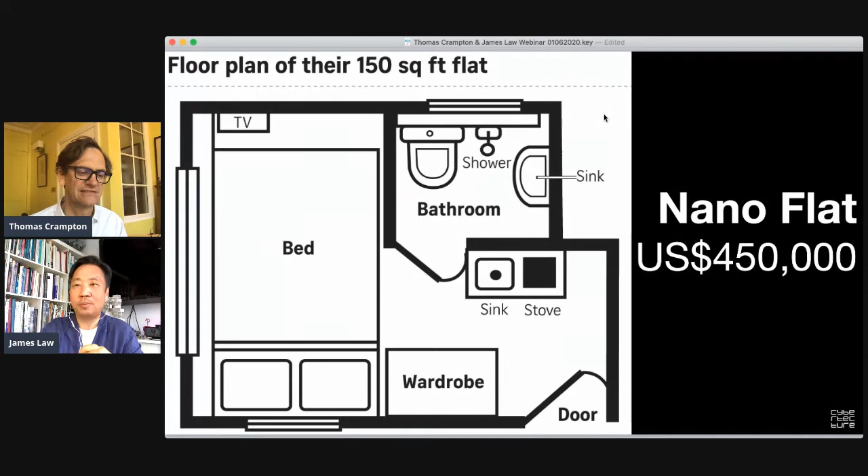But this is really an interesting physical manifestation of the problem, where if you are able to afford $450,000 to buy a property anywhere else in the world, you could probably afford to buy a house and even have a garden as well. But in Hong Kong, you literally just live in a room.

Many people who cannot even afford to buy an apartment must wait for public housing. And this is the state of our public housing: very, very old, very, very small, and not enough of it. The average waiting time for housing is now between 5 to 10 years, if at all. This 5 to 10 year wait is literally the golden years of your life.

If you are a graduate from university, and you certainly don't have the money unless your family has the ability to help you afford a property, you need to start saving up. But in the time you're trying to save up, you have to find housing. You want to live in public housing, but you have to wait 5 to 10 years. So in those 5 to 10 years, your limited income, which should have gone to savings to buy an apartment, goes onto extremely high rent. And so you've neutralized your earning power for at least 5 to 10 years.

And that's basically destroyed much of your hope of rising up in life in terms of your career. So the reality is that many families, even what we call lower middle class, touching middle class, let alone the lower classes, are living in extremely small spaces.

This is a typical picture, certainly not an outlier, of families having to share the rent and live in a very small apartment, where the apartment is defined as just enough space for them to cook, to eat, to bathe, to live, to do their homework, all in one space.

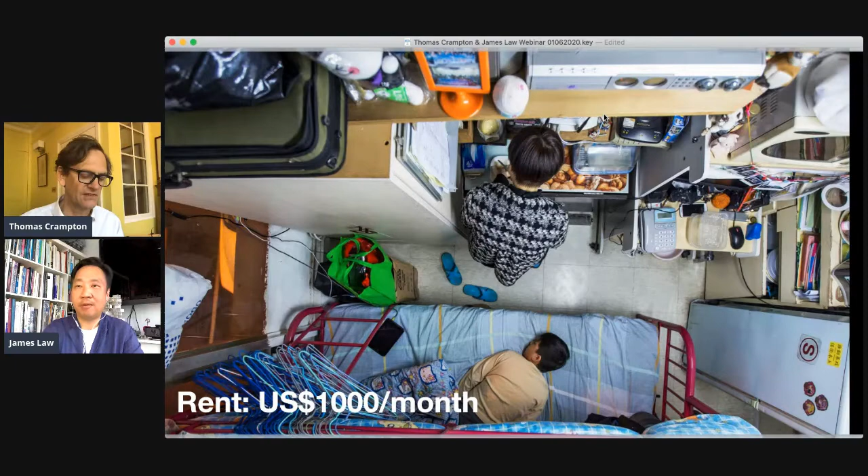So all of those contradicting factors have led to a pace of public housing that is not commensurate with the needs of the people here in a dynamic, growing city. And it's also not something just in Hong Kong, it's also in the rest of the world.

Moving on, to illustrate the apex of this problem: in an aging population like Hong Kong, just like in the rest of the world, elderly people don't necessarily have savings, but they still need to live, and some are pressed to live in what we call caged homes, where for $250 a month they get a caged bed space, basically their own little world. It's entirely inhumane, I would say, and also entirely unhealthy, especially in the context of COVID-19, where there is no social distancing, no capability to separate yourself from your neighbors. You're literally in a cage above your neighbors, so that's a perfect place for COVID to spread.

Absolutely, and there's no escape from it. The way in which we have built and designed the housing in this particular space is not designed, it's an outcome of need. There is no provision for pandemics, disease, and natural disaster, because no safety aspect, no health aspect, no resilience aspect has actually been considered. So it's pretty terrible. Let's move on to what that outcome is.

As we have seen in the news recently, even in the last 18 months, news about Hong Kong shows social unrest has really come to a fore. And in Hong Kong, social unrest is actually very, very rare. The last actual social riots we had was in 1967, so we didn't expect that it would necessarily come back. Hong Kong people are actually quite passive and quite civilized in general.

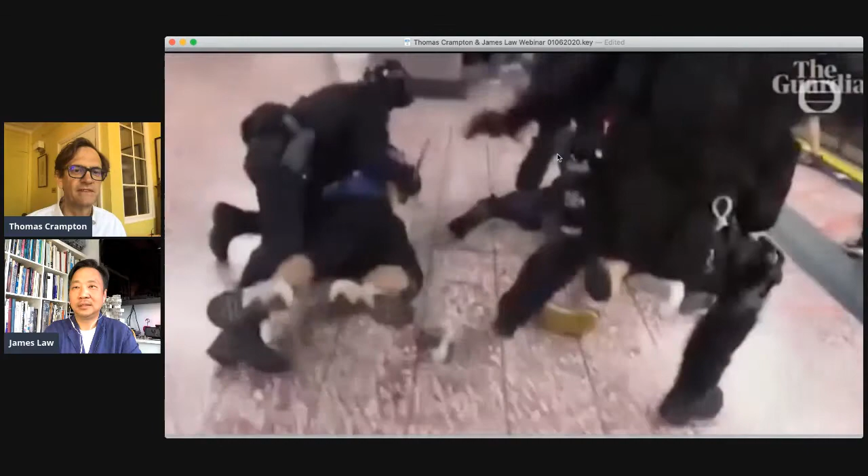This is a video of the police running down into a subway station, trapping protesters who are on their way home, and basically having quite a violent interaction with them. It's the last thing you want to see in civil society, when two sides of the story are coming to blows, and it's almost quite frightening.

Okay, so a harrowing situation, horrible conflict. Yeah, and of course, it's not just about housing. It's about many other factors as well. But as you can feel, the amount of stress and pressure and worry in society is quite high. And life is valuable to each and every one of us.

Having a home to live in where we can feel safe, where it's adequate for our needs, is a key basic need. And we've gotten to a stage now in Hong Kong where we are only able to build things like this, and we're not building enough of it to house everybody that needs a home. So what can we do? This talk shouldn't be just about problems, it should be about ideas and solutions.

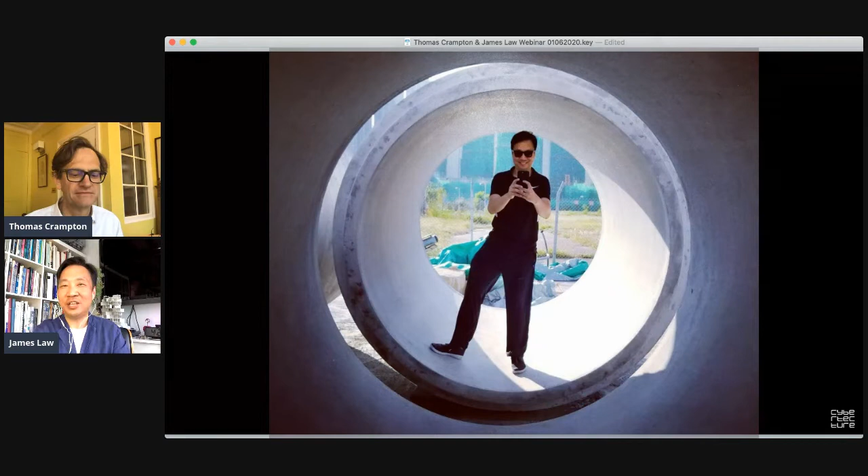So here, to provide a house for $15,000 US. Okay, so what is OPOD? OPOD is effectively using available concrete water pipes, which are mass manufactured in almost every major city in the world for storm water drainage, and converting these pipes, which are extremely cheap and already mass produced, into flexible housing for people.

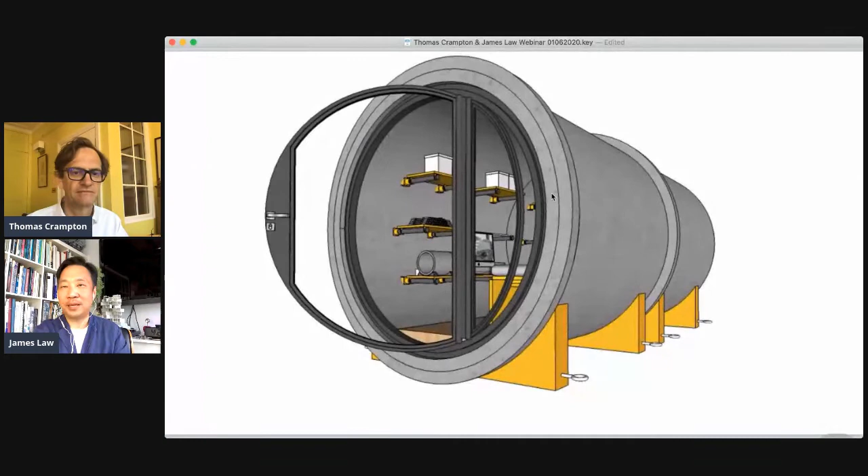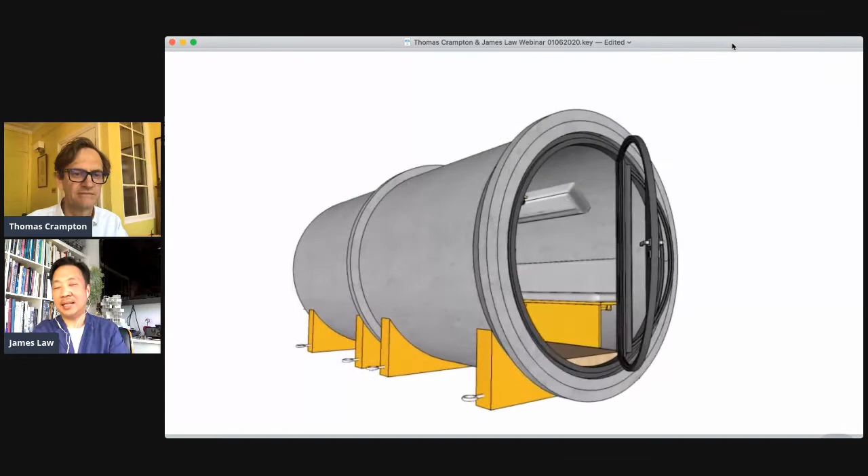The way we do that is to connect pipes together and fit them out so that inside there is a living and sleeping area, a bathroom, and a kitchen, and have these be deployable very quickly to vacant land in any city, providing that at a very low rental. Being concrete and being readily and quickly available is the only way we can provide housing that has an impact better than a conventional building.

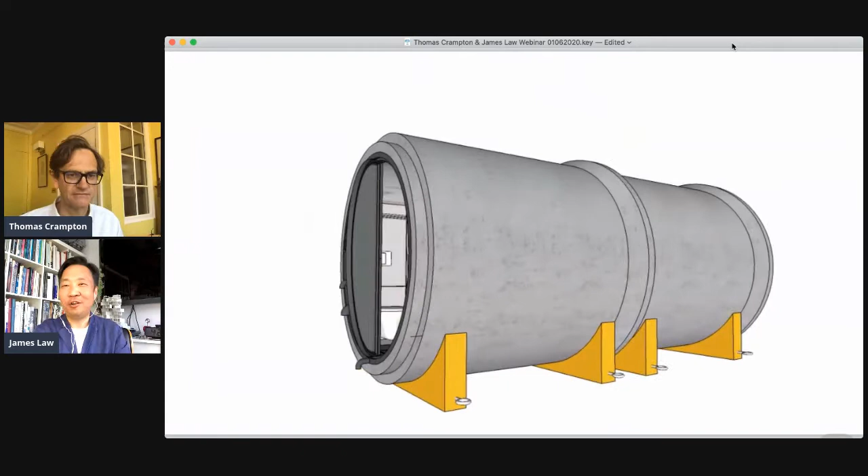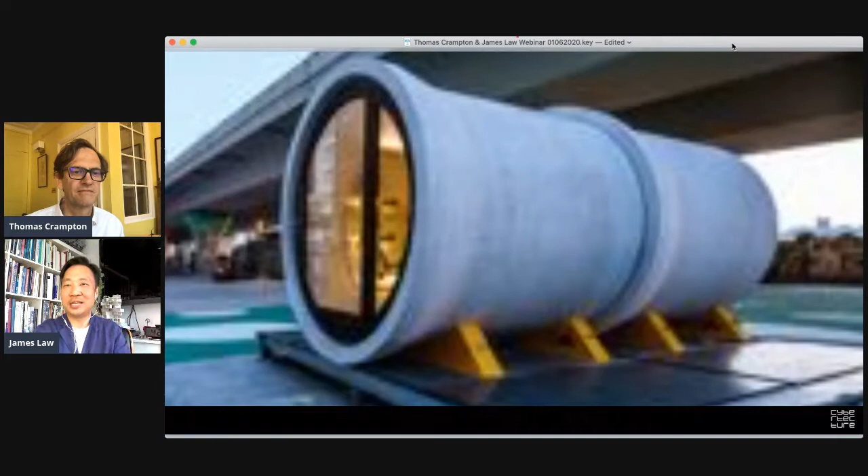So we went off and built the real one. This is a picture of one of the real ones, one of the prototypes. If you click through, you'll see it from different angles. It's actually quite a funky little house that has all the mod cons you need at a very affordable price. And it's very strong, it's fireproof. It's actually going to last like 50 to 100 years because it's a concrete water pipe. And it's movable as well.

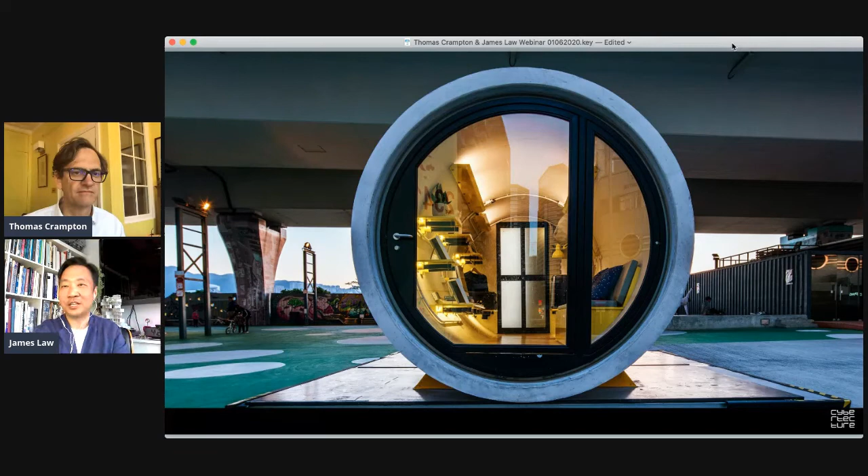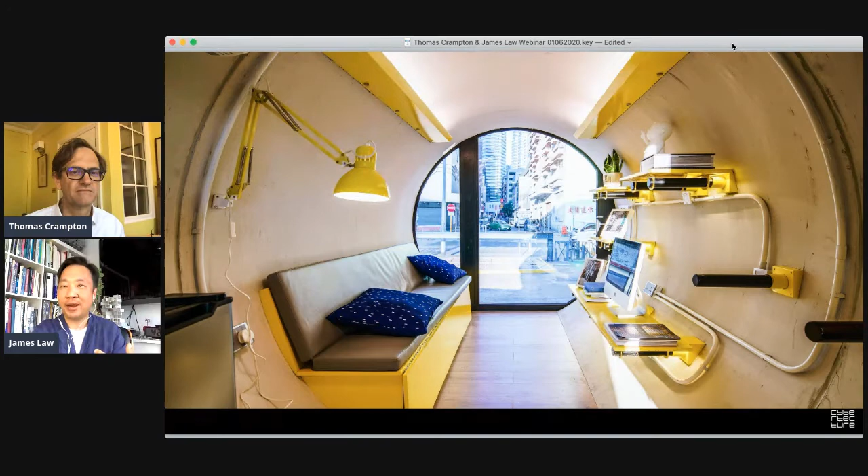This is the inside. The OPOD has two parts. This front part is the living area, and the back part is the bathroom and pantry area. It's very small, only 100 square feet. The sofa can be folded out into a bed. All of the furniture you see here is basically recycled construction waste - scaffolding pipes, timber boards, etc., repurposed to create this furniture and shelving.

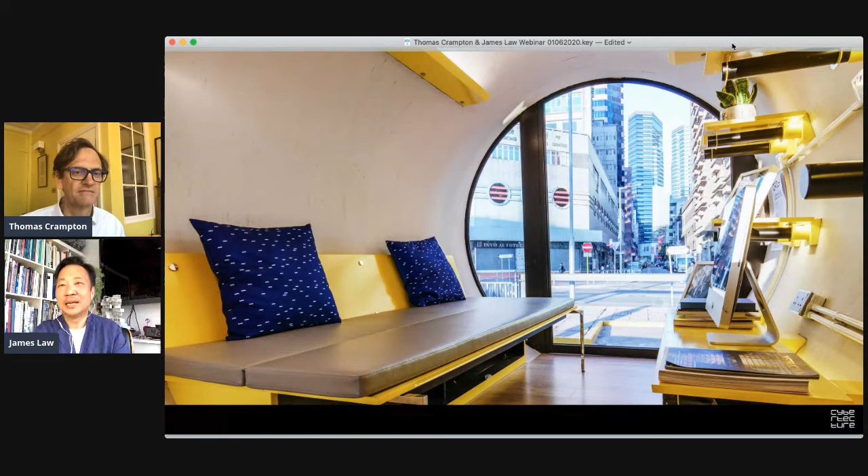At the back, you have a frosted door that goes into the bathroom and shower. On the right-hand side, a tiny food preparation area with a sink, microwave, and fridge. On the left-hand side, some open shelving for your clothes and personal belongings. It even has an air conditioner as well.

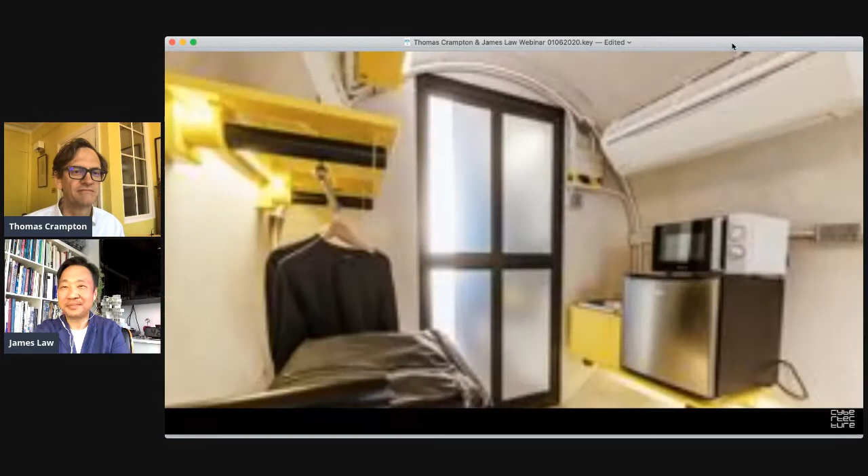This is a little zoom in to how primitive it is, but also it is decent. It has all the necessary things. We keep the wiring exposed so that we can tap off it to give other electricity points, etc. Then the next slide will show the bathroom at the back.

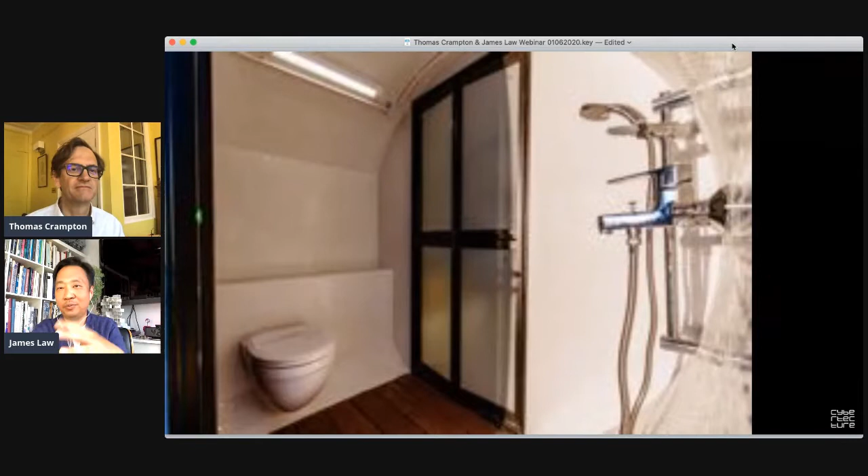Now the bathroom is very small, just like what you see on a plane or a boat. But the bathroom is actually really significant because most of the people living below the line here in Hong Kong, what you see in cage living or subdivided flats, don't have their own bathroom - they all have to share one. To be able to have your own bathroom is almost a luxury to them, but I think it's almost a kind of common human decency in terms of living. So here we can provide a bathroom for each tenant of each OPOD.

So would this be competitively priced relative to a cage house? Well, the cage house rental is at about $300 US dollars a month. Here, we are actually planning to rent this for less than the cage home - around the $200 to $300 range. So it's cheaper than the cage home and less likely to have transmission of COVID, for one thing. Absolutely.

So you live in your own individual living space, as opposed to sharing a big room where you're basically in a bunk bed, sharing a toilet, and sharing a kitchen. Here you have the decency of your own private space.

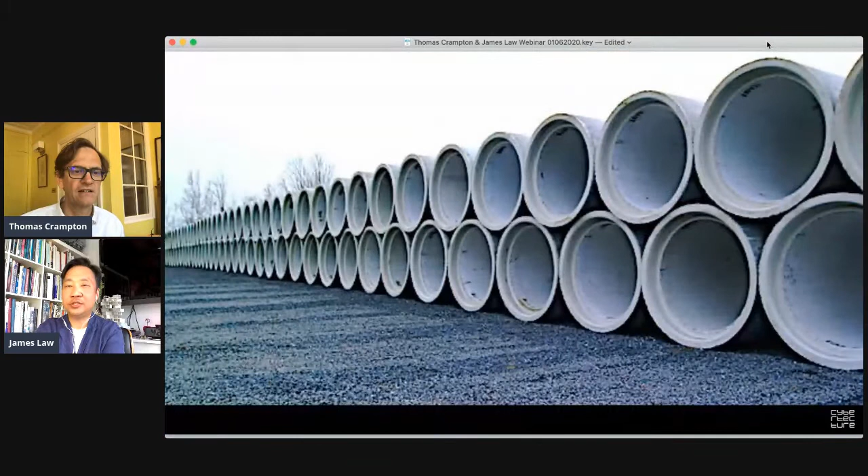Yeah, okay, so let's press on. So this is the inside. This is the next part of the idea—of course, providing one house isn't enough, so these concrete pipes can be stacked up to create housing en masse. And the next slide you will see is the design of this.

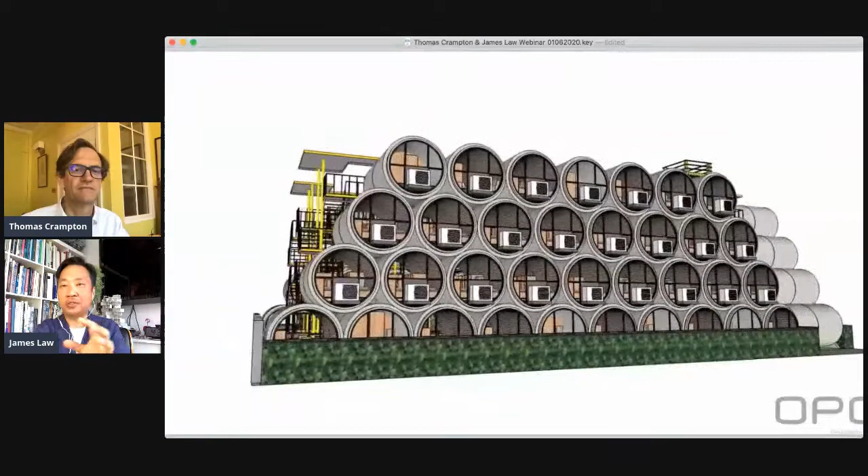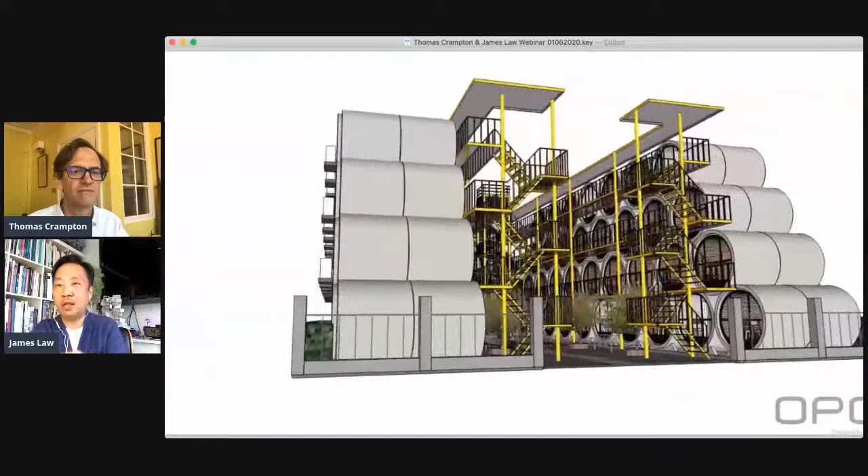So you can click on this, Thomas. This is an animation—this is housing that we're building at the moment, which uses these O-Pods in a stacked-up manner in the city on a vacant plot of land, allowing for quick deployment of affordable housing to people. This housing can later, when the land needs to be built on for other things, be relocated pod by pod and reconfigured into a different configuration somewhere else.

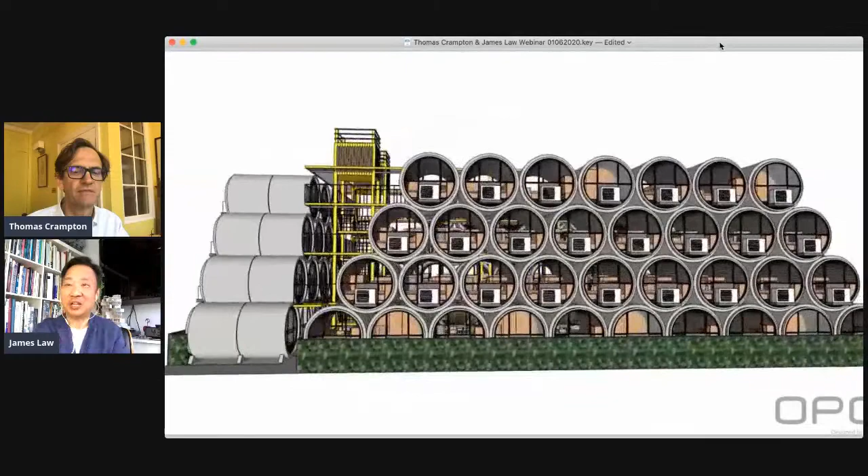And the air conditioning, I note, is individual air conditioning units rather than centralized. Absolutely, because we're keeping it as a modular approach—the next plot of land may only be able to utilize half of these pods. So if we had a centralized system, it would be very expensive to retrofit to the different numbers of pods from place to place.

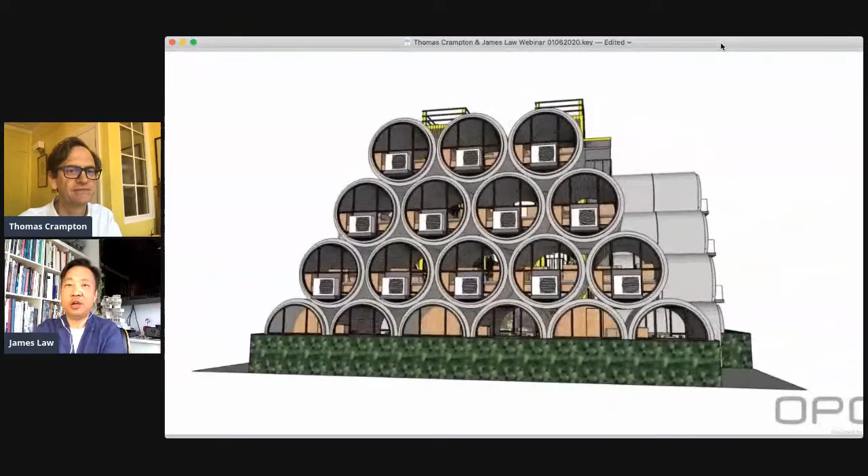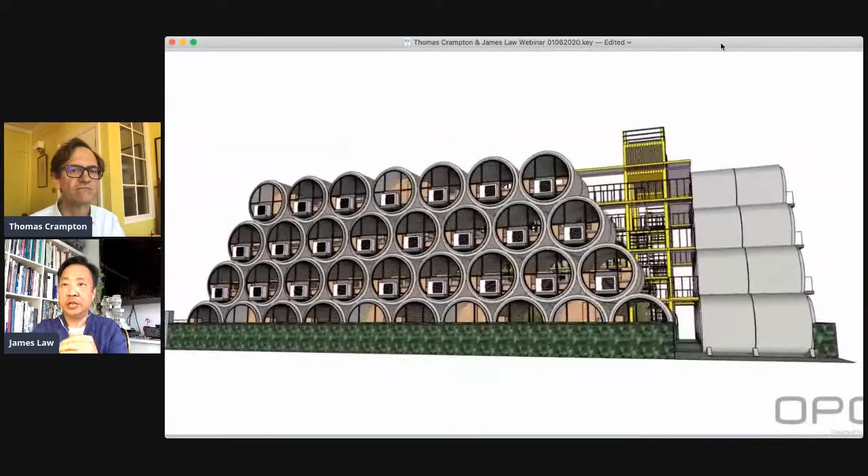We're getting a question about container homes—how does this compare in terms of benefits and disadvantages versus container homes that are sometimes seen in rural Hong Kong right now? Container homes do exist and are also a viable option, except that in reality, because container boxes are made out of steel, made out of metal, it comes with some difficulties, like fire protection and heat insulation. In Hong Kong, building safety is very, very important, and concrete has proven to be the most well-known material to build with.

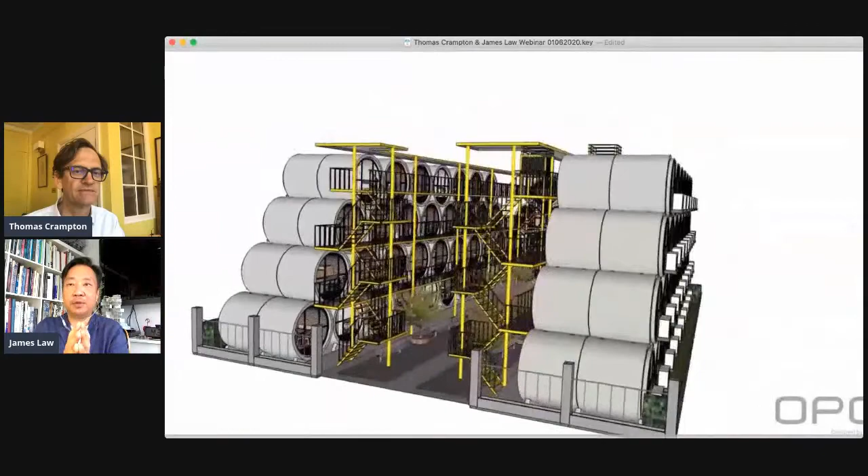So whilst container boxes could certainly be converted as housing as well, concrete is that much more resilient, that much more strong, and that much more stable from a design point of view. But both can be used. Very interesting—okay, so let's go to the next pictures.

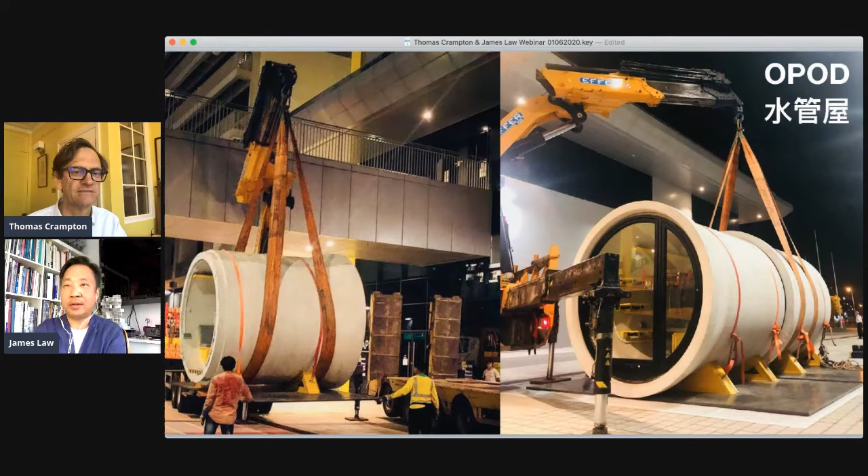So here's the real O-Pod being moved around our city. We've been doing a lot of tests about moving it around the city. And the next slide should be a time-lapse video that shows how we move it around the city.

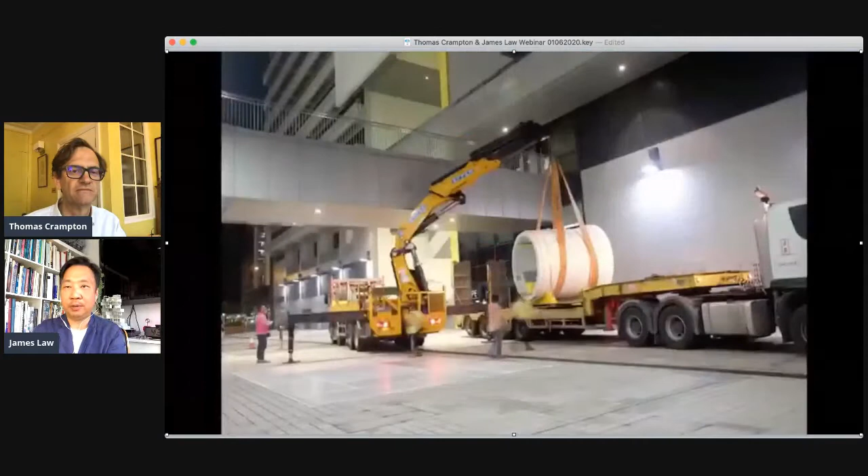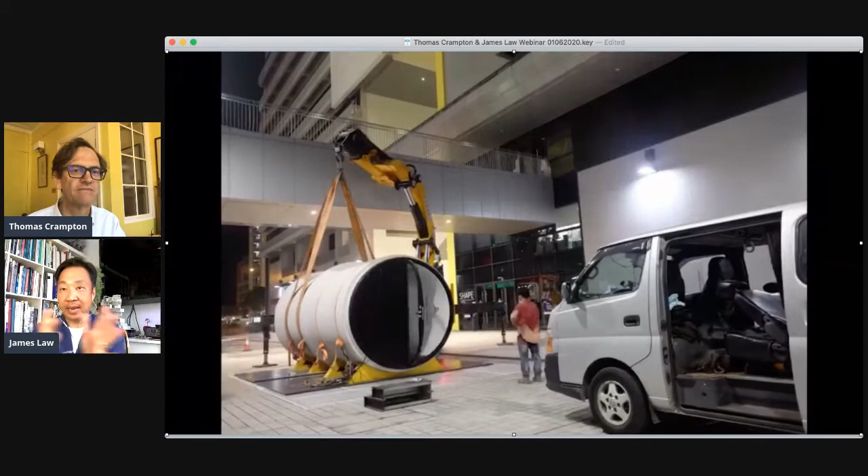Basically, one pod can be dismantled into two pieces, loaded onto the back of a truck, and then moved from the factory conceptually to a city plot, deployed, placed on the ground, and then connected up with the second pod, and then connected to electricity, water, etc. And then if it's a housing project, other pods will arrive next to it and be stacked on top, etc.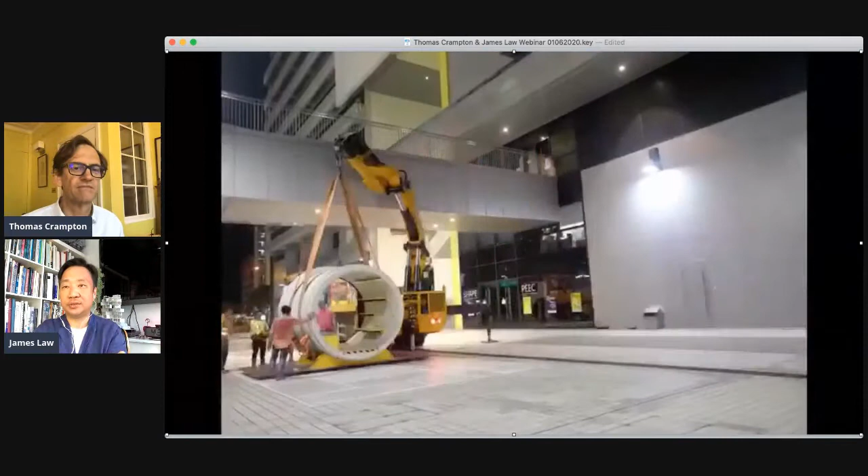And this process is very fast—literally within a day, you can do a couple of them easily. Whereas if you do a real building, it takes months and months, even years to build. Right, so you could finish it in a month or so—you could finish a pod building like the one you showed.

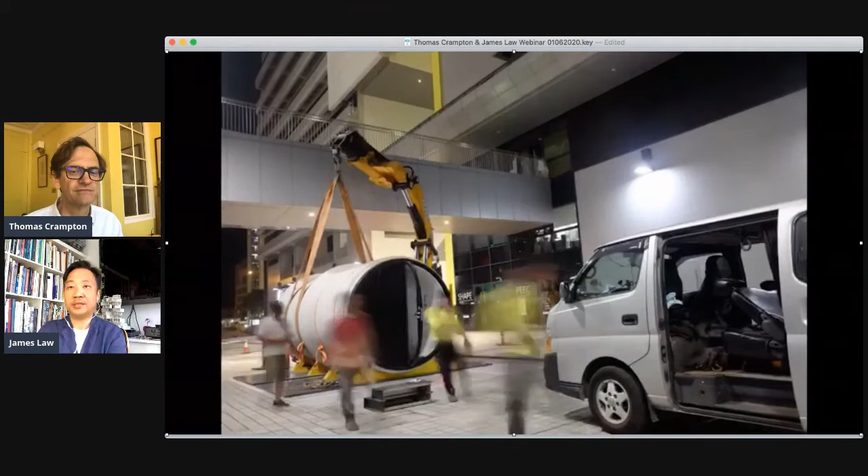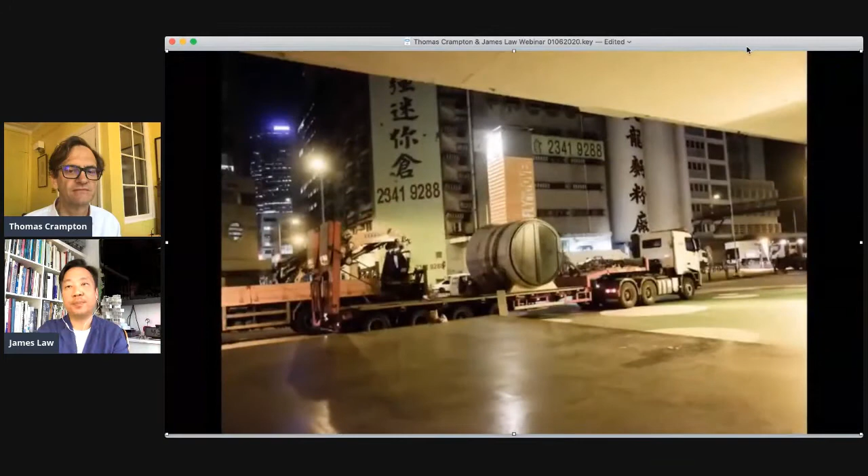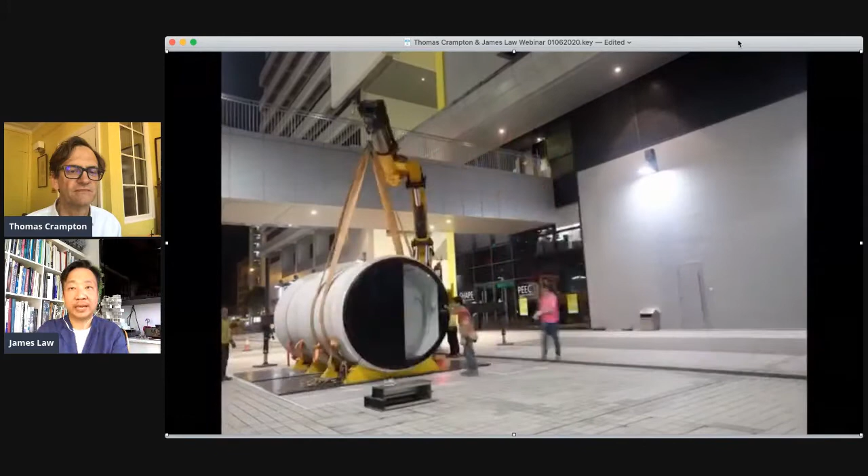Absolutely, and the great thing is we can then move it away later as well, because the way we're doing these projects now is using what we call transitional land—land that's underutilized at the moment but planned in the future to be something else. We're asking the government to give us that land for up to five years to do something, but we shouldn't build a building that can't be removed later, because that would create a lot of cost and a lot of disruption.

But if you don't look only at big tracts of land, and instead look at a city as a micro little jigsaw puzzle with lots of missing pieces in the gaps of buildings, in alleyways, etc., we could use micro architecture like this to infill little plots and gaps of land in the city, providing great housing right in the heart of the city that otherwise would have to be built many kilometers away in order to get land. So this is a kind of architectural innovation that I hope brings some relief to the struggle of finding land.

And for me, I'm really proud of this aspect, because as an architect, we do buildings for clients, but we don't really think about the problem behind, which is where do you find the land, and how are you going to actually bring relief to people. This kind of pixelated, modular, micro housing architecture can do something like that.

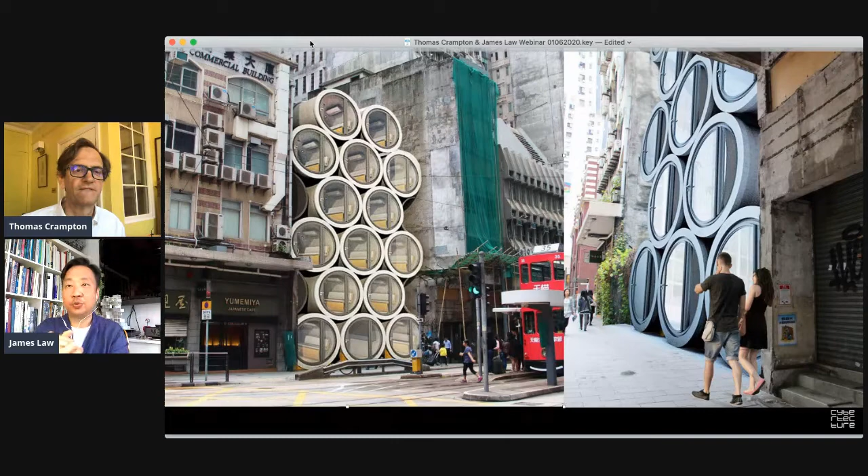And there's other examples. In the next slide, you'll see a study where we use some of the land under flyovers of highways.

Why not utilize it for housing in such desperate times? Next, please. Very interesting.

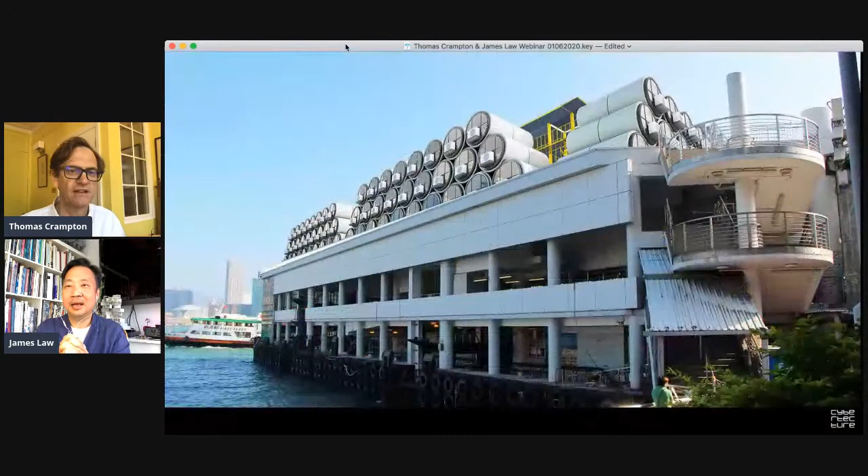Another aspect is, Thomas, I'm sure you walk past these every day in Hong Kong, where on the seafront we have other structures already built, like these ferry piers. These ferry piers actually have a flat roof which is very strong, because they were earmarked to build on top of once upon a time, and they were never built. So there's an opportunity to look at some of the infrastructure we have in any city and say, okay, there's a flat roof, there's space left on top of the structure. Why not stack these micro housing units on top and create housing for people right at the heart of the city? In this particular case, these will be the nicest micro housing units in the world — they'll have a sea view of Hong Kong's harbor, and they'll be extremely convenient because they're right in the center of the city.

Okay, next, please. Is that the last slide? I think that might be the last slide.

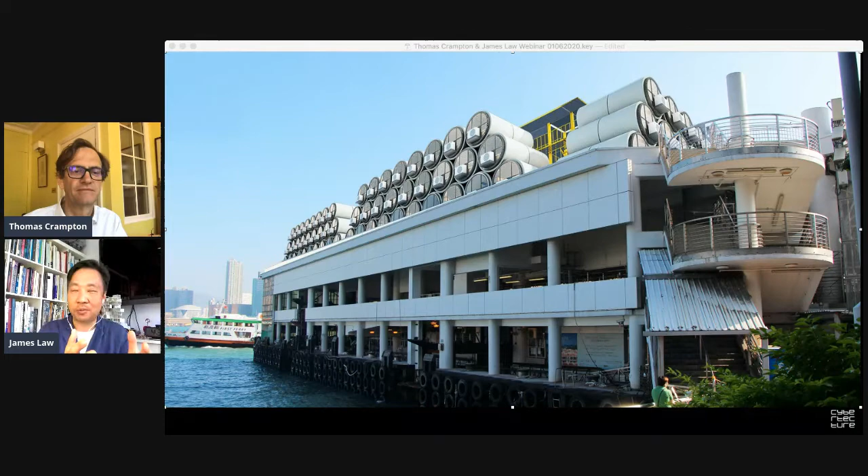So the first half of the story was really to highlight the systemic problem of affordability in housing, the availability of housing, and the rate at which societies can actually build housing fast enough to help people in their lives. I think in all three aspects, cities around the world are failing dramatically. And in the COVID-19 world, in this kind of economically broken world, you can see that the economic model of real estate — to make profits end on end and increase the value of property — is probably a quite suicidal thing to do, because eventually you'll have people on the streets telling you, hey, this is enough, is enough. Why are we working so hard and we don't have a roof over our head?

And then the second half of the talk was just a little bit of fun, where as an architect, using our design passion, we come up with something that hopefully could be useful. So what is the advantage of the round shape versus a sea container?

There is no particular advantage. The only advantage, I think, is that the round shape is a readily available pipe. We actually don't make that pipe — we buy the surplus pipe from the pipe factories, and then we use it for housing as opposed to water piping. So they give you a discounted price? Yeah, it's very, very cheap. I mean, the pipe itself is about £1,000 a pipe.

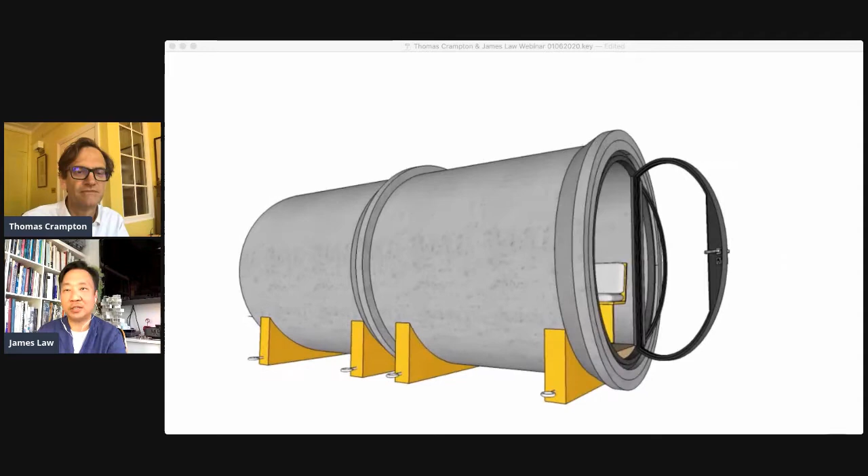Yes, entirely nonprofit. What we are doing at the moment is we're getting the land from the government, and the government is funding the construction of these. We are providing the design as open source, at cost, and we're doing the project management behind it. We're treating this as a kind of social innovation, social enterprise project that we want to share with the rest of the world.

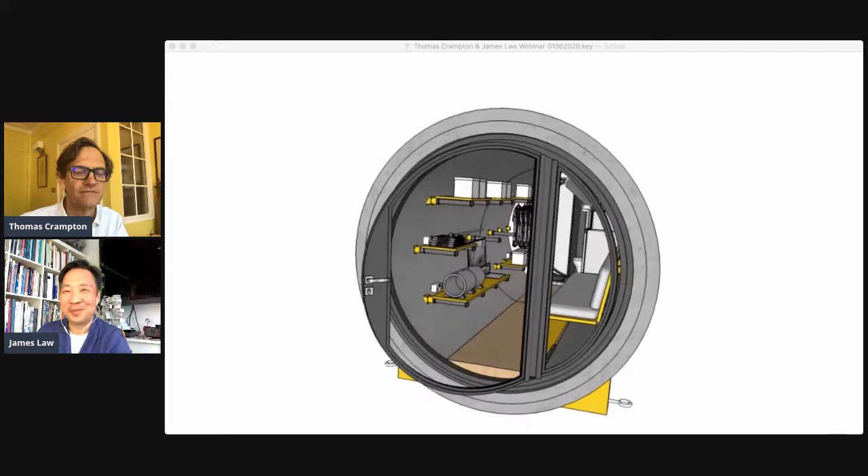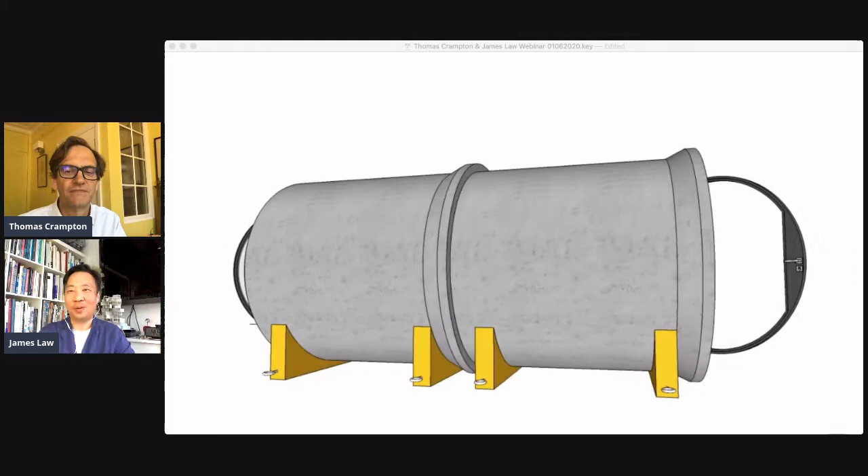We've been approached by quite a few parties from different parts of the world — some are developers, some are housing corporations, some are city management people — to discuss and share this idea. We hope that some of you in the audience who might be interested would like to contact us and discuss how we can share this with you, to hopefully bring real positive alleviation of suffering for where you are coming from. So yes, it's not a profit thing. We're not selling these like selling a car or anything. We are licensing them out

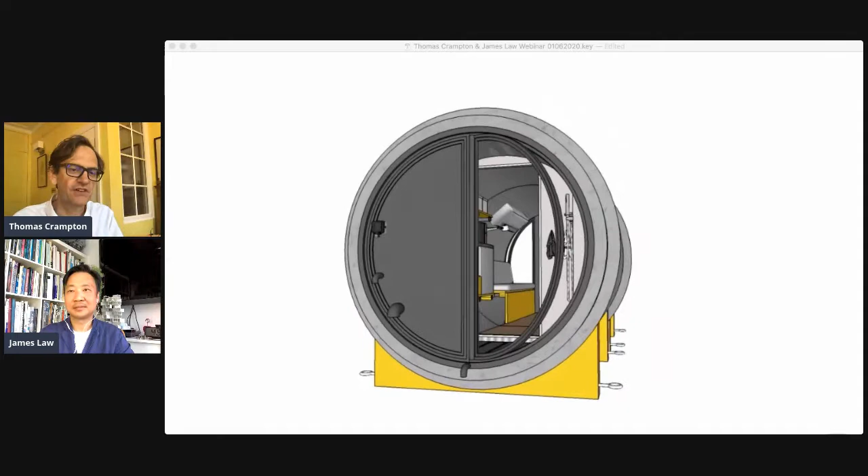to NGOs around the world or developers around the world who want to do affordable housing. And do you think, this question coming from Jennifer Chang, do you think this could become a mainstream way of housing, or is this going to be just a buffer on the fringes of a big problem? I certainly don't think this is a permanent form of housing.

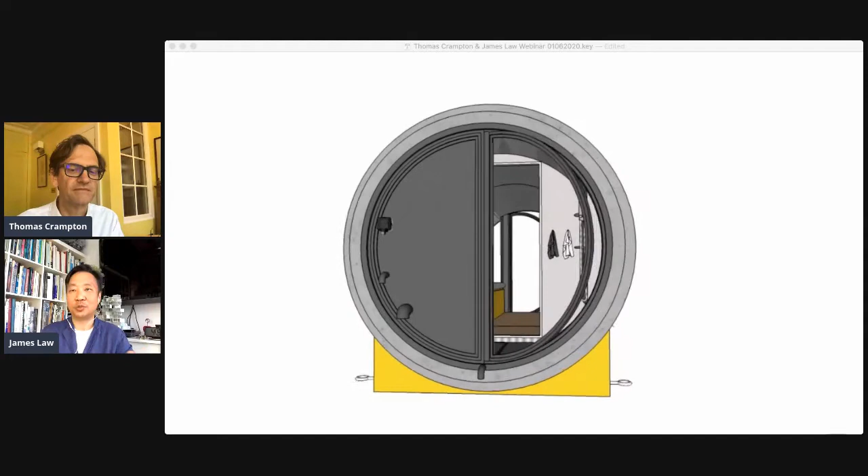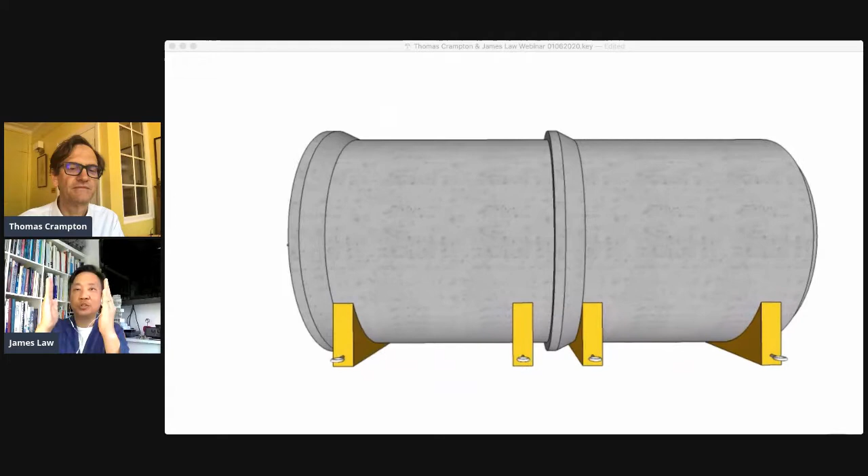I think there are going to be places where this will bring fast relief, and then hopefully allow the construction of permanent housing to catch up, because this is not really something that you want people to live their entire lives in. But I think the reality is that some places which are slow will end up having people live in these things for decades. But it's not what my intentions are. In any case, there is a gap between what we saw in terms of slum housing and permanent housing, in terms of affordability and time. And so this kind of transitional housing gives that amount of time for people to hopefully save up.

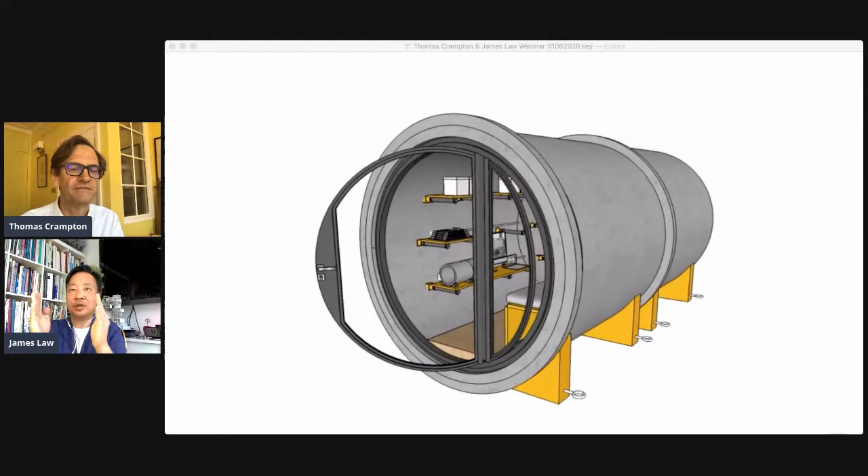And that's why we have rent so low here — we want to allow the living time here to be an opportunity for people to save money, and then also allow the community to build enough permanent housing to catch up with demand. This transition is like relieving the pressure, trying to avoid some of the other symptoms of this kind of housing problem, which are social unrest and disease and all of those aspects.

Excellent, okay, great. Well, thank you very much. And when will the first one be open?

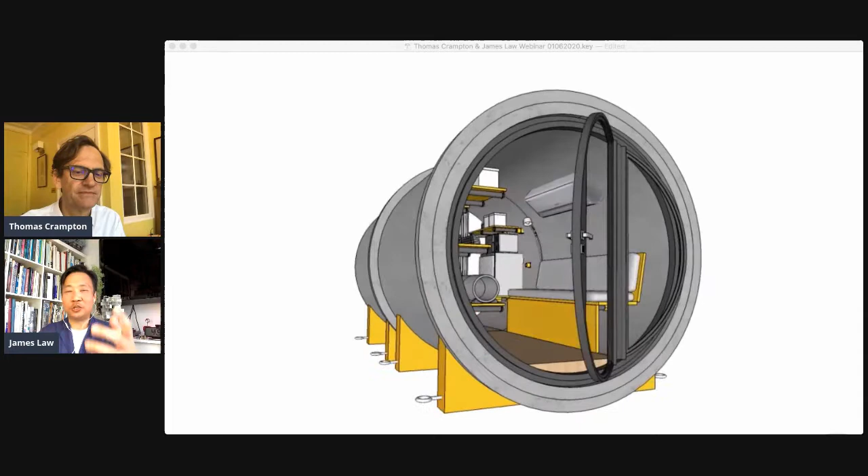Well, the construction of the first project actually starts this year. It's been delayed because of COVID-19, but it starts in November this year. Within 12 months we will have the first project completed, which will be 155 units here in Hong Kong, with other projects in the pipeline thereafter.

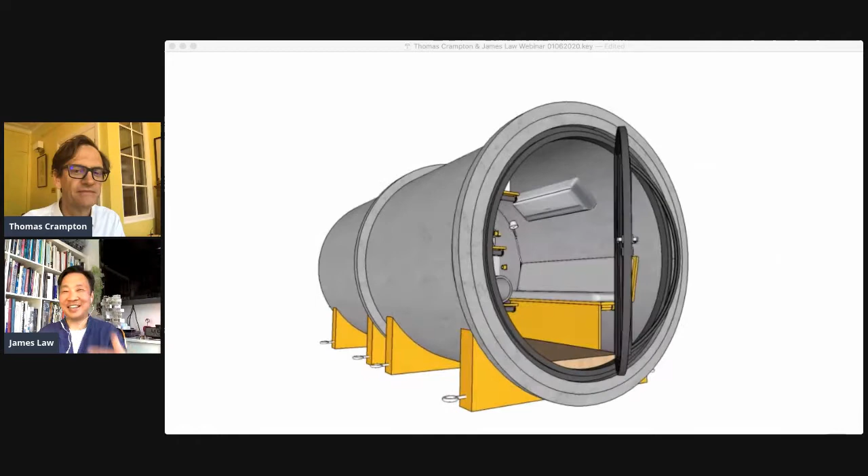So where will they be in Hong Kong? They're in Tsuen Wan, in the Tsuen Wan district, actually on the sea-facing site, so these lucky tenants will actually be able to have quite a nice view.

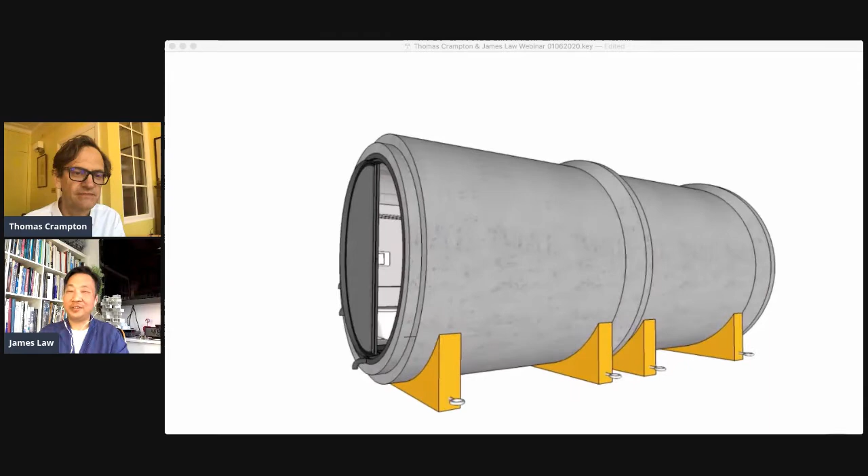Right. One last question coming in from Terrence: would you see this as a way to temporarily house people in crisis situations, or Fukushima, for example, or refugee situations? Yes, we've been approached to discuss this. In fact, this as a transitional housing for a bit of a longer term, like 6 months to 5 years, could work.

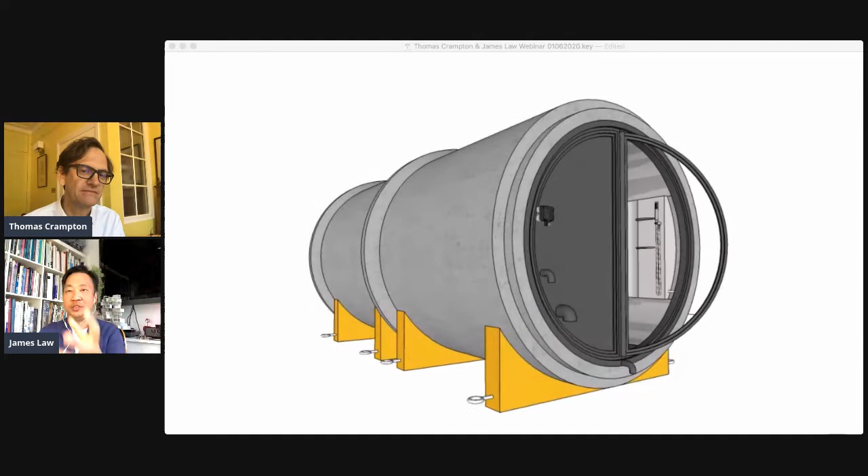But it's too heavy to be disaster relief housing, which needs to be delivered literally within a month. This being 20 tons in weight, you can't lift this by helicopter easily. So there is some use for some long-term community disaster relief, but not the immediate fast ones, which tend to be plastic or tent-based or textile-based.

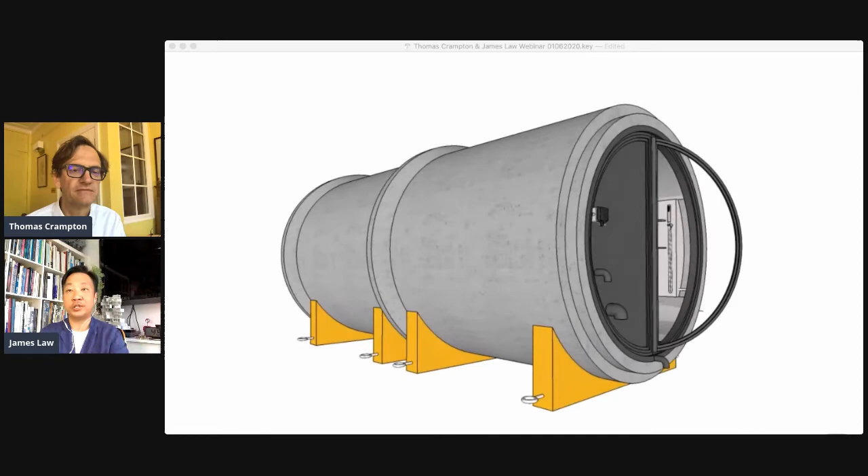Actually, the Hong Kong government discussed with us about using this for the COVID-19 quarantine camps which are under construction. But in the end they went for a much more lightweight solution, because they knew it needed to be done very quickly. In fact, they built one in 1 month recently for COVID-19, and we can't quite do that with this because it's heavier.

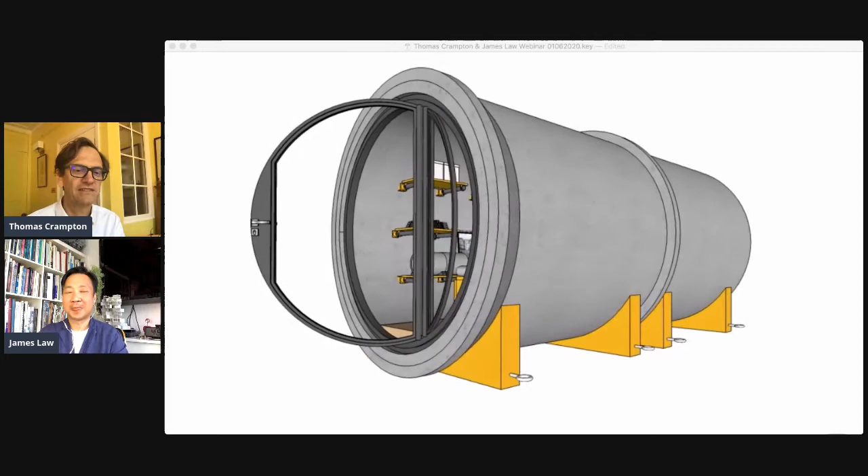Right, great. Okay James, well thank you very much. Fascinating project, and it's great it's getting underway, solving one of the big problems that was here before COVID, but is only made that much more difficult with COVID. Absolutely, yeah. Great, okay, thank you very much, James.